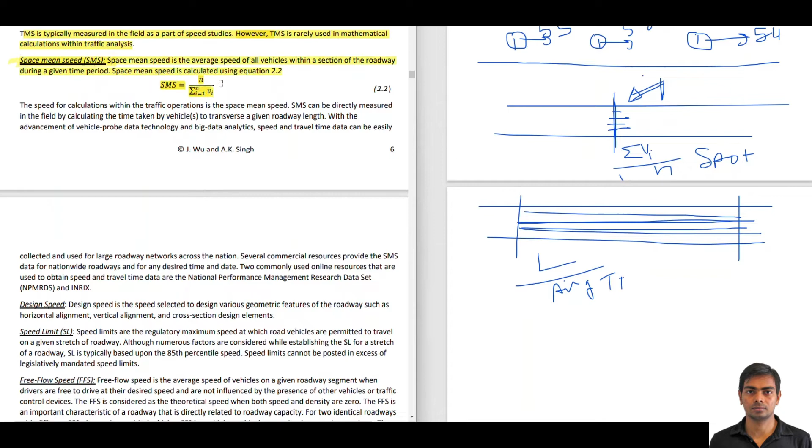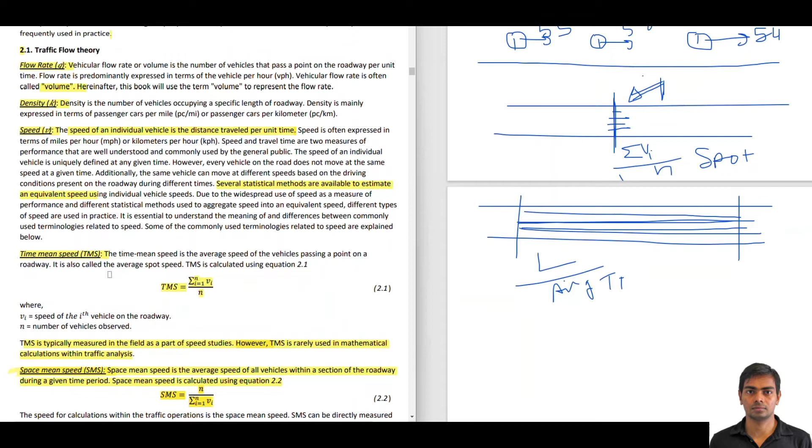So we have learned about this in probably third year of our undergraduate, third year, fourth year, and again we repeat this in masters. So these are some of the concepts that are used in practice. So for example, flow rate is heavily used in practice. Density. Now speed is defined in different ways. One is time mean speed, which is used in traffic studies but only a few times. And then the second one is space mean speed, which is heavily used in traffic operations. So the speed for calculations within traffic operations is the space mean speed, like I mentioned.

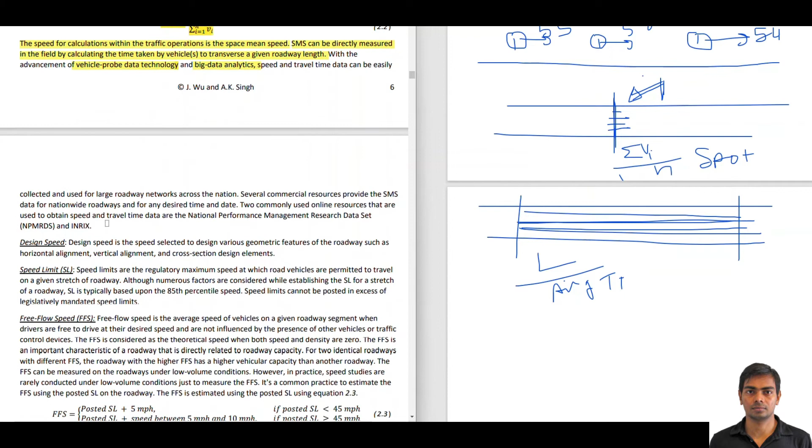Space mean speed can be directly measured in the field by calculating time taken by vehicles to traverse a given roadway length. With the advancement of vehicle probe data technology, this is GPS based data, and big data analytics, the speed and travel time can be easily collected and used for large roadway networks across the nation. So usually for space mean speed, now with the big data technology and everyone's cell phone and everyone's car having the GPS data, we do not have to go and collect the space mean speeds.

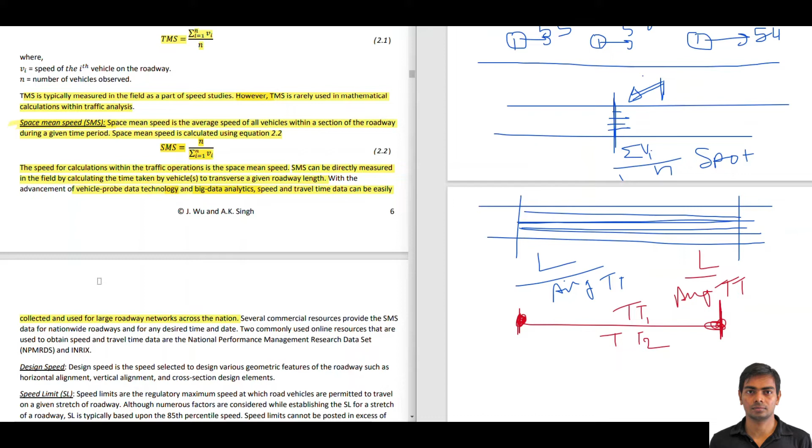So what we usually do is we have GPS based data and we figure out what the timestamp is when vehicle is here, then what the timestamp is when vehicle is here. That gives us the travel time of vehicle number one. Then we do it for multiple vehicles, so let's say call it travel time 2, and then now we know the length divided by average travel time. That can give us space mean speed. And since the GPS based data come in a consistent format, we don't need to calculate it for different roadways. There are big data analytics tools that can calculate the space mean speed for every roadway in the nation.

So several commercial resources are available that provide the space mean speed for almost every roadway and they provide it by any given time and date. So as we know, speed changes based on time. During rush hour the speeds on the roadway are lower, and maybe during the holidays there is congestion on the roadway and then the speed is lower. So this GPS based data can provide a space mean speed throughout most of the roadways in the nation, and we can choose any date and time to collect that data or to use that data.

So two commonly used online resources are NPMRDS, which is the National Performance Management Research Dataset. This is a free data source from FHWA. So if we are working on State Department of Transportation projects, then we can request access through our client to get access to this data set. And another one is INRIX. Several Departments of Transportation have contracts with the INRIX company, so we can get their space mean speed or average travel time data and congestion data. For example, Texas Department of Transportation in 2022 has a contract with INRIX, and if we are working on any Texas department project, then we can get access to this database.

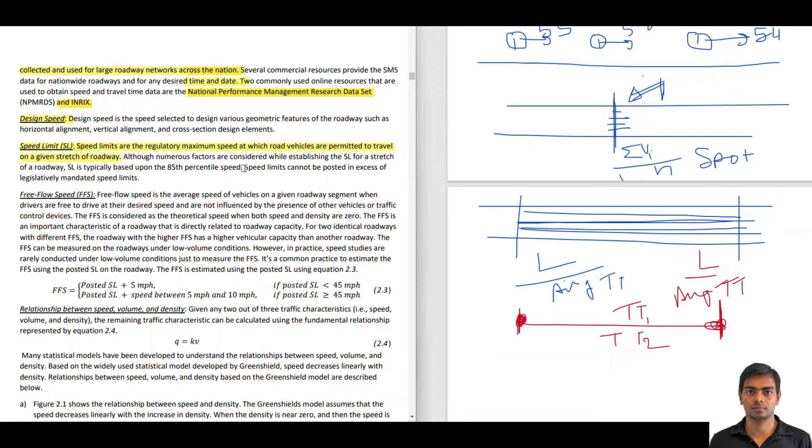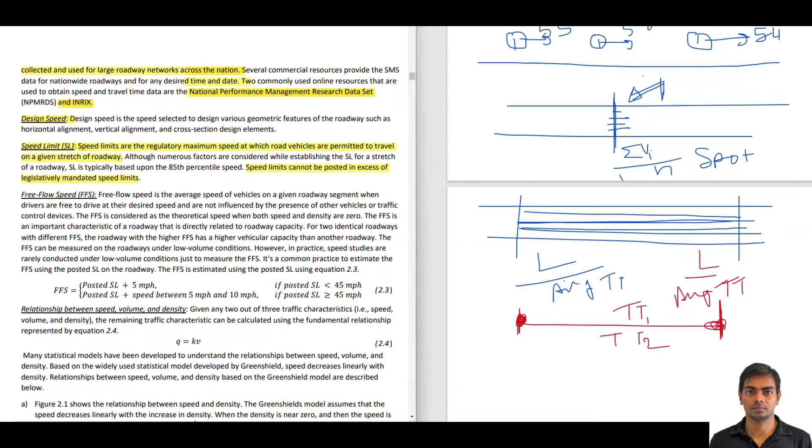However, for the majority of the cases there are local guidelines, local preferences. Let's say in a certain area the arterial speeds are usually 35, then the speed limits are automatically set to 35 without traffic studies. So speed limits cannot be posted in excess of legislatively mandated speed limits. So there is legislation that literally sets the speed limits. We cannot set arterial speed to 60. So there is legislation on what kind of roadway can have what kind of speed. That's how the speed limits are set.

Now let's look at free flow speed. So free flow speed is the average speed of the vehicle on a given roadway segment when the drivers are free to drive at their desired speed and are not influenced by the presence of other vehicles or traffic control devices. So this definition of free flow speed is coming from the Highway Capacity Manual. Free flow speed is considered as the theoretical speed when both flow and density are 0. So there is a mistake here. This should be flow and I will correct it in the text in the PDF.

So free flow speed is the theoretical speed when there is no one on the road and vehicles are kind of free to drive at their desired speed. That's the free flow speed, given the posted speed limit is still there.

In practice, the recommended way of collecting free flow speed is to collect the speed of the vehicles when the flow is less than around 200 or 300 vehicles per hour per lane. So in practice, if we are observing a speed when the traffic conditions are such that the number of vehicles per hour per lane is about 200 or 300 vehicles per hour or lower, then we call that speed free flow speed. However, because of time and budget constraints, we hardly go in the field and collect the free flow speed.

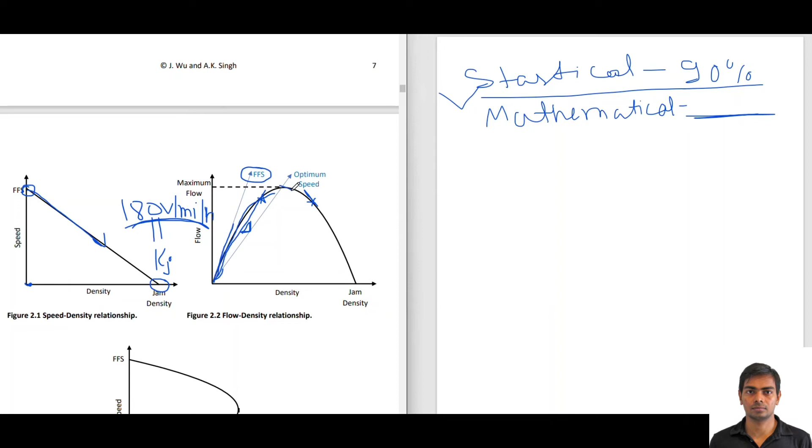The slope of the curve at point 0 is known as free flow speed. The equation of this curve is a parabola, so if we calculate the slope of this line connecting 0 to the center of the curve, this is called optimum speed. So optimum speed is the speed at which the flow is maximum.

So if I can draw this parabola again, corresponding to this, when density is 0, our speed is free flow speed. It starts like this, and then at exactly half of the density, because this is a linear relationship of density versus speed. So if we are changing it to flow, flow is equal to density multiplied by speed. There is a linear relationship between speed and density, and if you are trying to calculate flow,

let's say speed is equal to minus a times density, where a is the constant. Then flow will be equal to speed, which is minus a times d, times density, which is minus a d square. So in simple terms, if speed and density have a negative linear relationship, then the graph between flow and density will be an inverted parabola, which is like this.

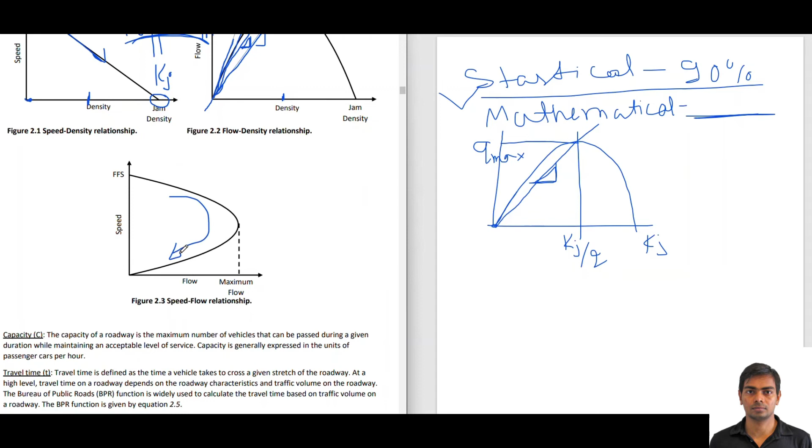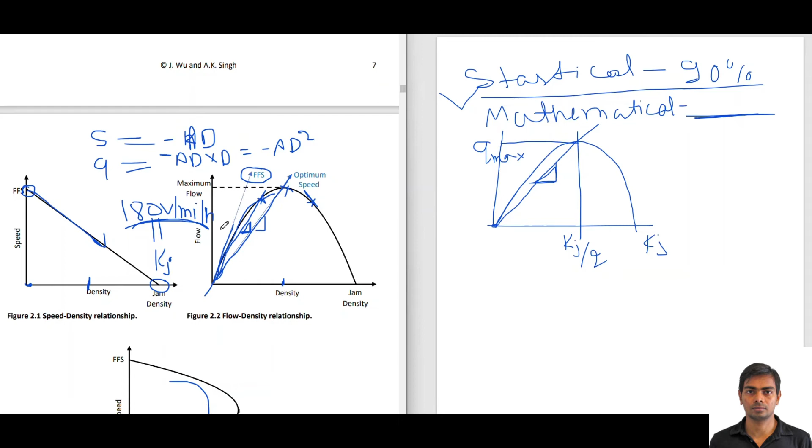The third one is speed versus flow. This curve is barely used in practice, and we will not discuss this curve. However, in theory, there are several mathematical derivations, shock wave theory, and a lot of academic importance to these curves. In masters, there are several lectures on derivations based on these curves. So these curves are very important in academia as well as in practice. Practice is more simplified than academia.

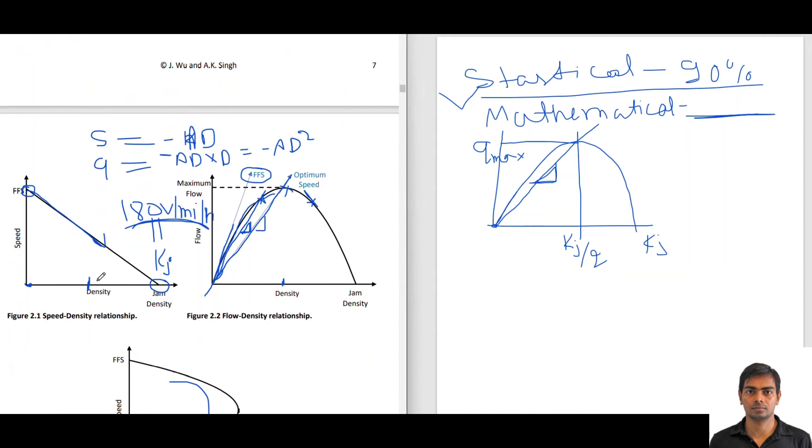Capacity of a roadway is the maximum number of vehicles that can pass during a given duration while maintaining the acceptable level of service. Capacity is generally expressed in terms of passenger car units per hour. So capacity is number of vehicles per hour for a certain level of service. For example, level of service is defined from A to F, and let's say our acceptable level of service is D, and the corresponding volume for D is 1600.

And let's say the corresponding volume at capacity is 2000. So even though 2000 vehicles can theoretically pass through a roadway in a given hour, this is not an acceptable level of service. So we define the capacity as the number of vehicles that can pass through the roadway such that it still maintains the acceptable level of service. So the capacity is a function of acceptable level of service.

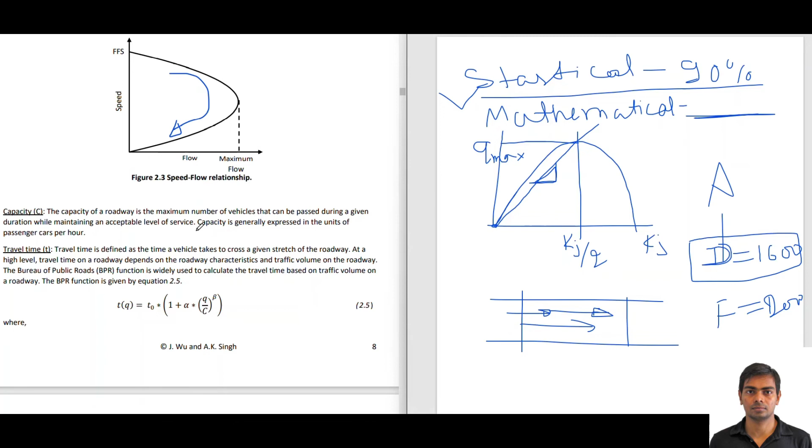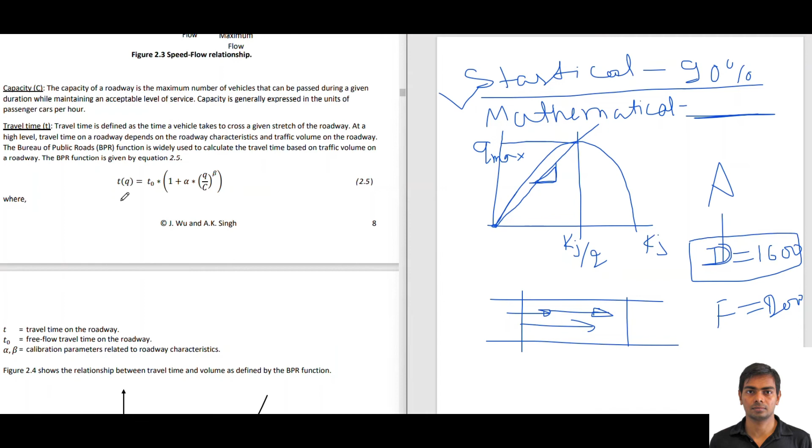Travel time is probably one of the most important concepts in the field of traffic operations. Travel time is defined as the time it takes for a vehicle to cross a stretch of roadway, to go from one location to another. Now, if there are more vehicles on the roadway, the travel time will go up because vehicles are stuck behind each other and different vehicles have different characteristics.

So in practice, we usually use the BPR function, Bureau of Public Roads function, which connects the travel time on the roadway to the free flow travel time, capacity of the roadway, and the current flow. The travel time T(Q) is T naught, the free flow travel time, times 1 plus alpha, which we will discuss in chapter 3 on travel demand modeling, typically 0.15. Q is the current flow; the higher the flow, the higher the travel time. C is the capacity of a roadway, typically a constant.

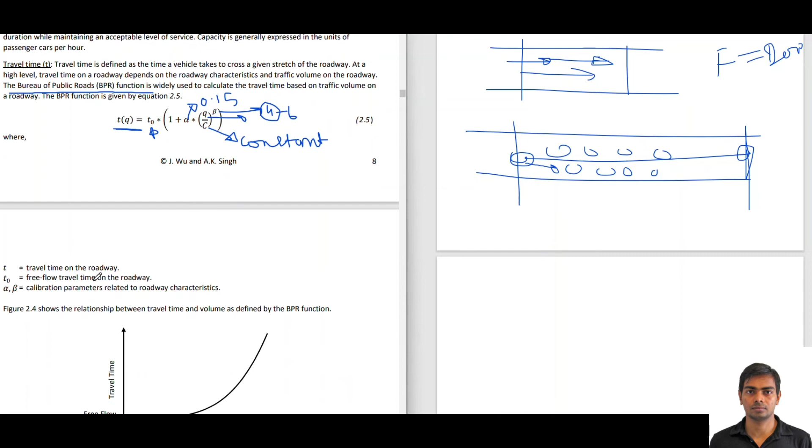And Q is changing, so as flow changes, the travel time changes, and the value of beta is typically between 4 to 6. Typically 4, sometimes 6, sometimes different. We will talk about alpha, beta, and other values in the travel demand modeling chapter. So this is how the BPR curve looks. There is free flow travel time when flow is 0, and it goes up usually with power 4. Now this curve is convex.

There are a lot of great implications of this curve being convex, and there are very good mathematical relationships which we learn in our master's classes. So one of the great resources I have seen over the years is a book written by Sheffi. It's called Urban Transportation Networks, by Sheffi at MIT in the 1970s or 80s, that goes through the mathematical derivation of user equilibrium, stochastic equilibrium, and many other things.

And a lot of these concepts hinge on this travel time being convex. So if the travel time was like this, linear, many of the derivations might not have worked out, or if the travel time was like this, then some of the features we use in our traffic operation might not have worked out the way they work out.

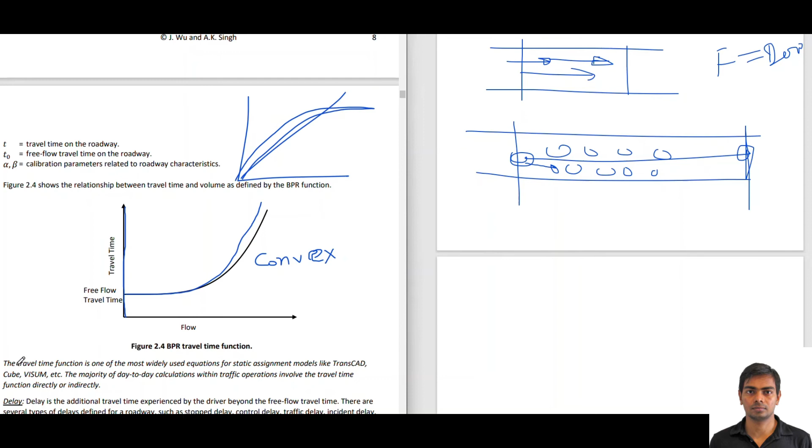So the travel time function is one of the most widely used equations for static assignment in software like TransCAD, Cube, Visum. We will discuss these softwares. Visum is an emerging software which is now being used by Florida DOT, and TransCAD and Cube were the traditional software that are being used for most of the travel demand models. The majority of the models in Texas are built in TransCAD.

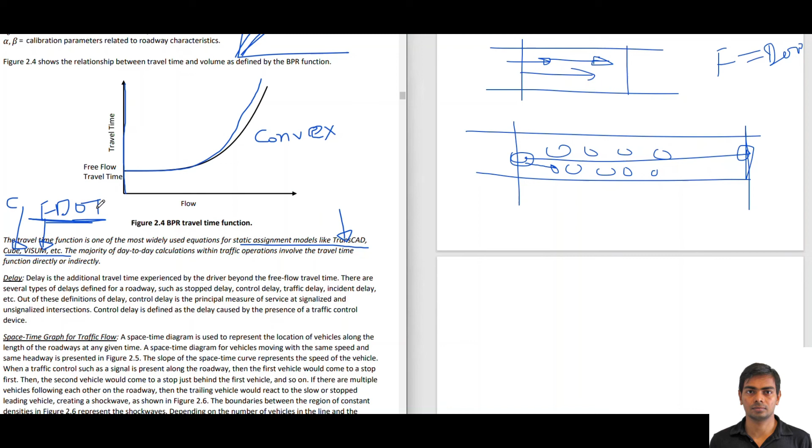Houston MPO model is built in Cube, and probably the Dallas Fort Worth model is also built in Cube. So there are different metropolitan travel demand models, and they are built in different platforms. So FDOT has recently switched to Visum, which is a big move from TransCAD and Cube to Visum. So we will see what the future holds in the travel demand model world, and we will discuss this at greater length in chapter 3.

The next one is delay. Delay is the additional travel time experienced by the driver beyond the free flow travel time. There are several types of delay defined for a roadway. For example, stopped delay, control delay, traffic delay, incident delay, etc. So out of these delays, the most important delay for us is the control delay.

Control delay is what is calculated in practice, and that's what defines the level of service at different intersections. So the level of service at signalized intersections is defined based on the control delay. Control delay is defined as the delay caused by the presence of a traffic control device. We will look at the definition and the use of control delay at intersections in further detail later on.